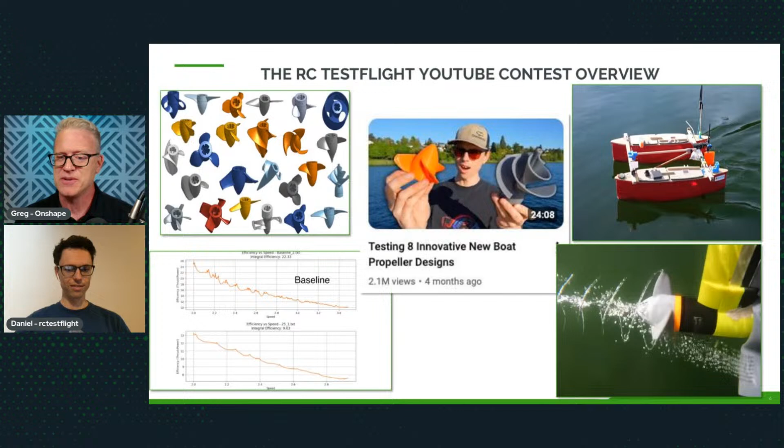So talking of community and talking of other people, let's bring in Austin at this point. Austin, welcome. Thank you. Hey, and so you've been working with Daniel for some time. Tell us a little bit about how this got all hooked up together.

Yeah, so I published my book last year, and I've kind of been evangelizing it since then. So I contacted Daniel earlier this year and told him about my book and what it could do, and it kind of just gained ground steadily as he became more interested in it. I sent him an airfoil, just an airfoil you could update. And then he was at this time mentioning he was setting up the competition, looking for a way that he could allow his community to vary the propeller design.

And that was kind of interesting, because the best version of that was the baseline for the rest of the competition. So in one day, essentially, we took that adaptable airfoil model, put it in a more complicated part where there's several airfoils in combination, and then made a modular propeller. And I still remember Daniel being excited about how the swept tip rebuilt every time. So we just had a lot of fun with it since then.

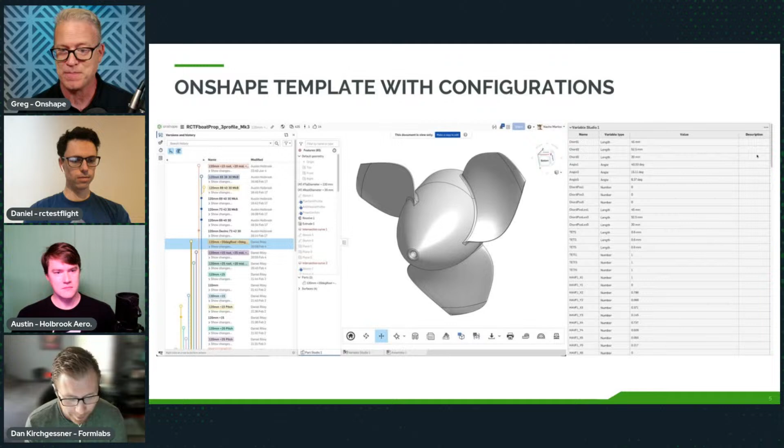So we've got the competition. We've got people uploading digital CAD, hopefully using Onshape, right, and using this baseline, and then going crazy. But of course, you need to get them bolted onto the test motor and put them in that test rig. That takes a lot of serious building skills, right? And Dan, I think this is your area. So welcome, Dan, and tell us a little bit about how you got involved with Daniel and this whole competition.

Yeah, thank you so much. I'm Dan Kirchgessner. I'm the partnerships manager here at Formlabs. And the way this came about was pretty natural and organic and really great. So we had been talking to the Onshape team about content creators they were working with, and Daniel's name came up. This was probably a year and a half ago. And at that time, we had the Form 3, our third generation of our SLA 3D printer out, and we sent one to Daniel. He got some good use out of it.

But earlier this year in April, we released the Form 4, which is our newest machine. It's much faster, and we sent that one to Daniel as well to try out. And the timing happened to line up quite nicely with this propeller design competition. So he was able to iterate quite quickly on these designs, which, as you guys were just mentioning, and I'll use that to jump into kind of how Formlabs is involved.

We make 3D printers. Obviously, to make a physical object, you need a way to produce it, but you can't produce a part without that 3D file first. So you start with the 3D file, then you start to think about production. And propellers, more than a lot of other industrial design worlds, are all about iteration. As Daniel and Austin were just saying, there are a lot of steps of trying something, seeing how it works at a specific RPM and torque value, and then going back to the drawing board and trying it again and again and again. So when we released a printer where the whole point was to iterate quickly and iterate multiple designs during a single day, it seemed like a really perfect match.

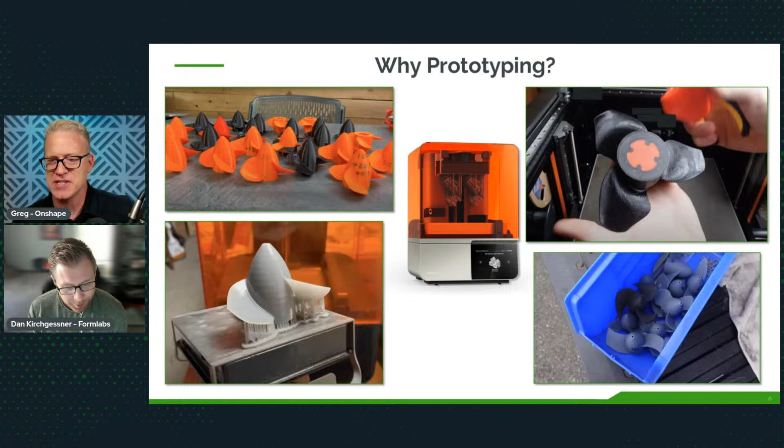So it looks like, in that bottom right-hand corner, there's a bucket of lots of Form 4 printed propellers there, I think. Do you have any idea how many Daniel created, including the iterations? It seems like it's going to be a lot. I don't actually. And when Daniel jumps back on, I'd love to know if he has a rough total part quantity, because I'd be curious to know. But I'm sure it is dozens before he even started soliciting designs from the public. Okay. So do you want to tell us a little bit more about Formlabs?

So a big part of what Daniel was trying to figure out as well from his end, and I know we have some materials on the next slide as well, is just choosing a material, because we make all our materials in-house.

They're all designed to play very nicely with our machines. So unlike some 3D printers, which are obviously great for a lot of people, we try to minimize the amount of fuss that needs to happen with our printers. There's not a lot of bed leveling or things like that. We make the software, we make the hardware, and we make the materials, and they're all designed to sort of mesh very nicely together to minimize that back and forth.

And yeah, this slide. Oh, go ahead. I was going to say that with the portfolio of materials like this, it looks like there is something very specific for just about everything there. It's not just about making a prototype of shape. It's about making it work in an engineering situation too, right? Absolutely. And the ability to bounce between materials quite quickly. On our machines, you can switch between materials in less than 30 seconds. So having a few of these different materials on hand, depending on the material characteristics and properties you want out of your parts at the end, is really important.

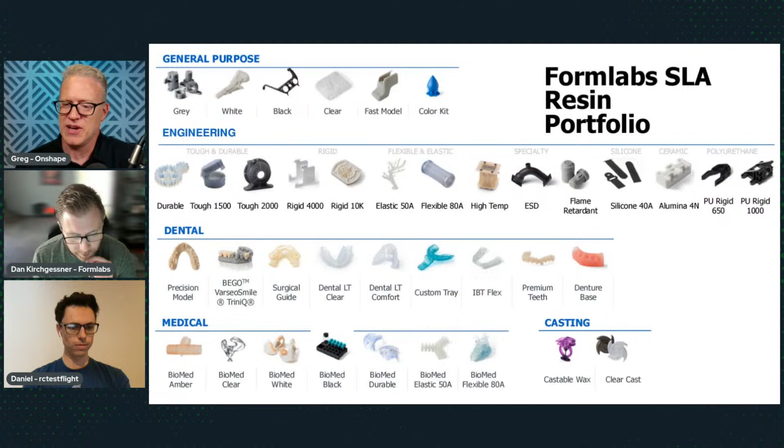Cool. So that's interesting for just the sheer amount of printing that you got done there. And I know that there were multiple episodes of this series, and people were sending in redos, and all sorts of things going on there. That was great. So moving along, it was about this time that one of these other threads I talked about intersected here, and I happened to see this model because it's a public model, and one of my colleagues showed me and said, hey, look at all this cool stuff that's going on.

And I saw this big, long design table. Now, what you're not seeing is that there's probably 250 more lines on that table off the bottom of the screen. And to me, and of course, I use Onshape a lot as head of product, it's near and dear to my heart that something like this will trigger one word in my mind, and that is automation, right? This is an absolute textbook case of an opportunity for automation.

So Austin, you and I separately, outside the competition, of course, because the competition is already going on and people are watching YouTube by this point, but you and I got talking. Can you remind people or just tell people about that? Yeah, I mean, I recall working with Nacho and him sending a few emails back and forth, and I didn't expect anything to come of it.

And then like 2 days later, I got this almost completely current to what's live now feature that would just ingest all the data the way that my book describes it needing to be formatted. And looking back, I like the way we polished it. We worked on it for like 2 months, adding all the bells and whistles and niceties, but I was like, this is finished. So this is excellent. Yeah, cool.

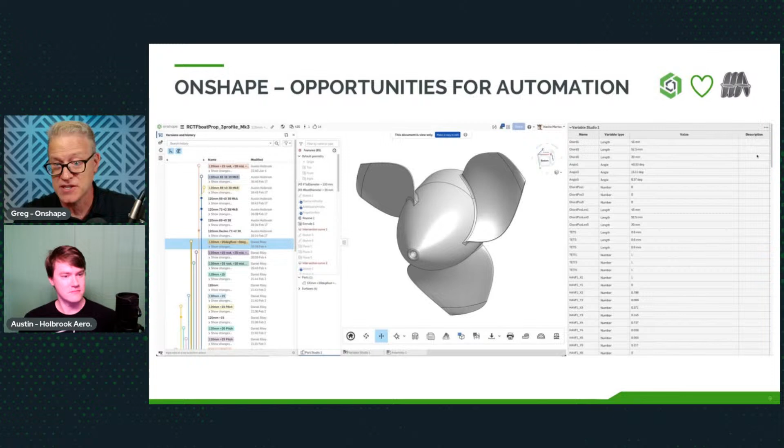We'll get there, right? We're going to get there. I'm taking people on a journey here, right? So we're looking at a big table. You can regenerate this. You can change a few of those 250 numbers and have everything update parametrically, which is great. But when I saw this, I saw an opportunity.

And tell us a little bit briefly, we can go into it a couple of slides later, but there is a book, right? There's a book called the Holbrook Aerospace Airfoil Vector Format, right? Yeah, great name. So yeah, it's a little bit long to say. HAVF. Yeah. And this is what I had to look at, and I saw the opportunity to take data

and create a companion feature using Onshape's custom feature capabilities. We have a language that we developed as part of Onshape called FeatureScript, and with FeatureScript we can create custom features. It's the same language that we use to create the normal features in Onshape as well, extrude, loft, fillet, right? But we can create custom ones. So what Austin's been hinting at is that we created a HAVF profile feature, which takes all of the dirty work of that table and puts it in a nice user interface.

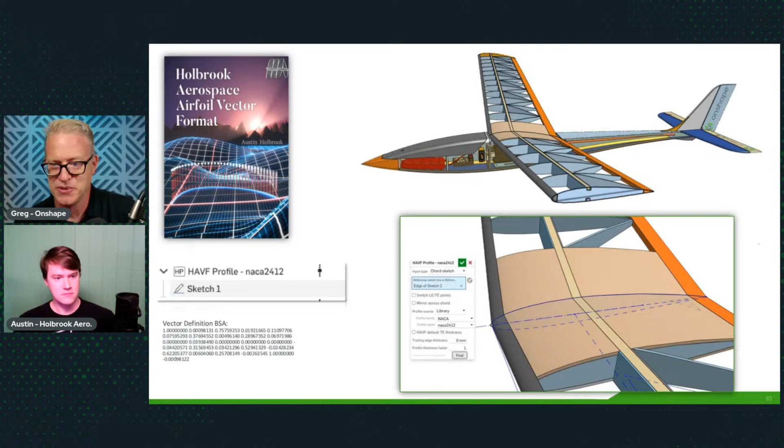And I was doing this anyway because I was building some radio control gliders at the time. That's why it triggered me, just out of serendipity, right? So I built this feature and showed it to you, and here we are. This is the feature which is now published. It's available publicly. You can get it now if you lean in and get that QR code. You can be building HAVF profiles within minutes.

So what does the feature do? Just take us down some of the user interface here quickly. Yeah, what the feature does is any line, any mate connector, you can select it and put this vector-based airfoil on it, and it'll stay glued to that line or mate connector no matter where you send it. So normally when people deal with airfoils, there are popular websites like airfoiltools.com, and it's been coordinate based forever. So that means it's really rigid.

You scale things once and it's hard to deal with, you know, the trailing edge scales with the rest of the design. And here you actually have the option to, you know, keep the trailing edge a consistent size or let the vector control it completely and have it scale uniformly.

And there's all sorts of bells and whistles, like you can flip the direction, you can mirror it across the chord, and you have the option to use the small library, which is sampled from the book, where you can input any custom airfoil HAVF vectors that you wish to kind of create airfoils that nobody really has yet.

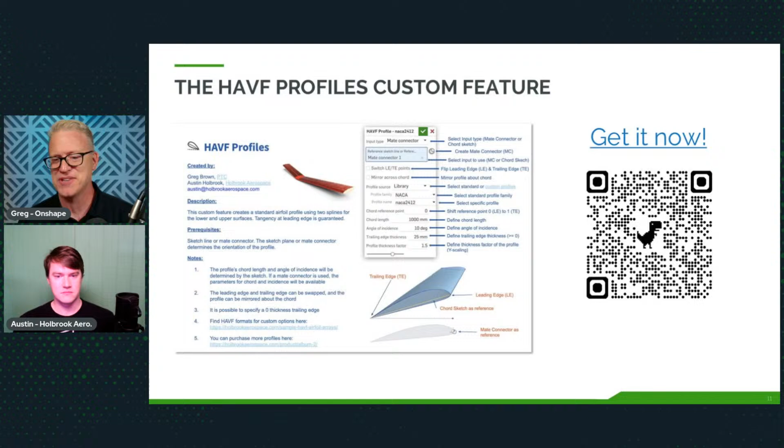It would hardly be practical even for me just as one person, but it was a great kind of showcase of what it could do if it was more optimized. And that's kind of what the feature is, it's completely taking all that. You don't have to build a spline that's perfectly constrained with dimensions anymore. You can just select a line and select a mate connector, and all that's taken care of for you. And there's zero rows of custom data.

You can input the same exact custom profile or a profile from the book, and I modeled this in hours, where I was working on this other model over several days. So it's kind of turned it from a novelty into a really powerful tool, because you have all the geometry data over here in a really fast way to ingest it, and it works really well. Yeah, exactly. And then it fits in with this ethos of making things publicly accessible, sort of open source. But your information is protected.

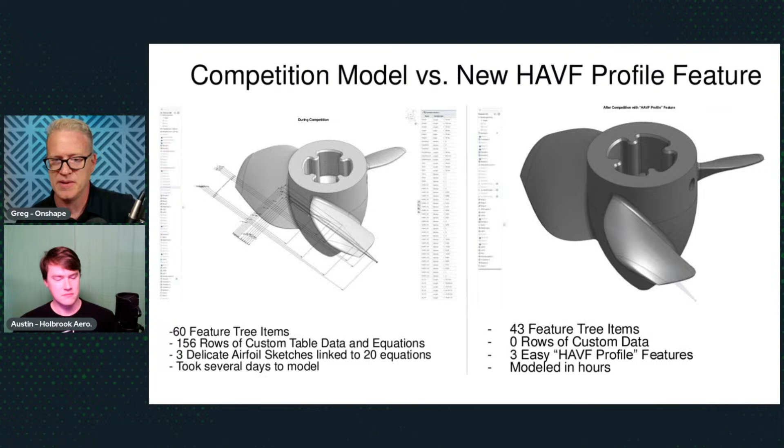You mentioned the book a couple of times. There is some information available about that. There's a YouTube tutorial, as you mentioned. What does this tutorial dig into? Well, this video is different than the one I mentioned that I published yesterday, which was how to make your own airfoils. This tutorial is basically how the feature works. Okay. So basically explaining what we worked on.

And then it talks about the purpose of the vector format and just how well it scales, like automatically updates based on chord or angle of attack, and goes over the book a little bit, about how it removes all the entropy possible from the most popular online airfoil databases, which makes it possible for me to do this fitting process where I can describe all these points using Bezier curves. So yeah, just a kind of tirade about that.

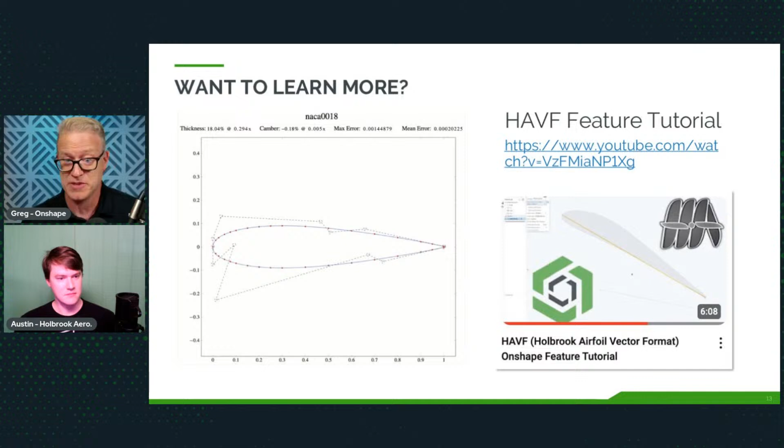Yeah, I was obviously motivated and excited to work on this thing. But while all this is going on, millions of people are watching a design competition. And Daniel was doing a bunch of testing, creating graphs, and coming up with an ultimate winner, since it's a competition. So Daniel, do you want to come back and talk a little bit about some of the takeaways from the design competition?

All right. Do we have Daniel? There we are. There we go. All right. Yeah, there we go.

So yeah, how did it all shake out? What did we learn? Yeah, well, for me, the biggest takeaway was that there's a lot of novel designs out there, but the designs that just look like normal old propellers are, unfortunately, what worked best. It's a little bit more boring that way, but it's the way it is. And one of the really interesting things is that propellers that look more like airplane propellers are actually performing better underwater. And that's probably only true at the lower RPMs and lower speeds that we were working at for the competition.

But the winning propellers kind of looked like you just pulled them right off an airplane and stuck them on a boat. So that was really interesting. I guess there'd be some practical limitations, though. For container ships and things, you wouldn't expect to see gigantic, long, thin, slender propellers because of robustness and the chances of hitting things. And so the engineering has got a lot of trade-offs, right? And that being one of them.

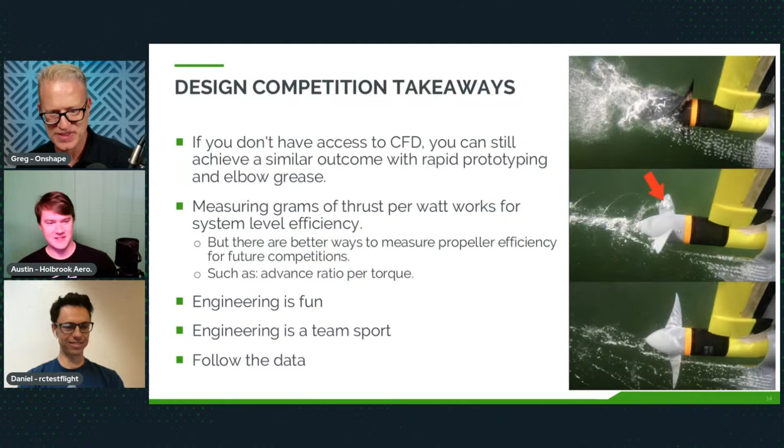Yeah, I think a lot of people kind of got let down because everyone deep down, they want some sort of crazy, novel, organic, nature-inspired looking propeller to be some magical solution that outperforms everything else and becomes the future of transportation as we know it. But sorry, guys, the data says that run-of-the-mill propellers are kind of what works best. Yeah, specifically 2-blade, normal boring propellers. Mm-hmm. Okay. So it's great. And moving on to some other takeaways.

Again, from my point of view, watching this from the side and then participating just on a parallel track, what was really interesting is that with Onshape being part of it, you can access Onshape anywhere, right? You can access it when there's a web connection on a mobile device, a Linux device, a Chromebook, whatever. So that kind of fits in with the open source. Let's get everybody involved, the team sport part of it.

The open source nature of that public document that Austin first shared probably opened a door to many, many more people who otherwise wouldn't have had a chance to participate. And collaborating, if you haven't used Onshape, you can collaborate purely with links. In fact, you don't really want to send a file, right? There's no such thing as an Onshape file. It's a link, and the link can be shared securely. It can be shared publicly, however you choose to do it.

And as you probably have guessed from here, it is high-powered CAD. It's serious professional level CAD that you have access to, and has incredible automation capabilities, which I hope I demonstrated through working on that custom feature with Austin.

And what I like about it is it's changing the fastest. I've worked with other CAD programs that have been kind of similar for the last decade, and I look forward to see where Onshape's going, because I don't think it'll be in the same place a year from now. I know. There'll be 17 more releases by this time next year. So that's how it goes around here.

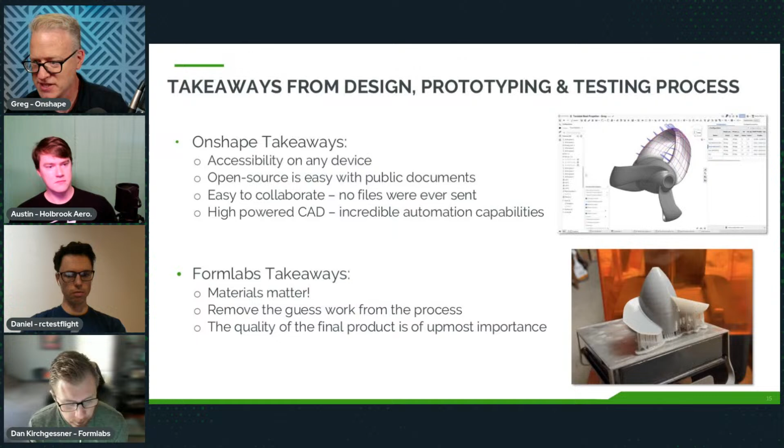Here's a question. I'll jump it to Daniel first, but then Austin, if you have any input as well. We've gotten a few questions about multimodal propellers that could potentially be used for air and water. Daniel, have you looked into that? And what considerations would you have in mind if you were starting a project with that as a goal?

Wow, that's a tough one as far as an engineering challenge. Water is 800 times more dense than air, so yeah, it's going to be very tricky. I would say that the best approach to that would just be to make a motor that can shift gears or something to work at different ranges of resistance, because it's going to be really hard to make a propeller that can work well in both. You just need to spin it slower for water.

I guess on that note, we also got a question, which was, if we're mostly talking about water, when you're designing for air, what are the main things you're thinking about? And it sounds like you started to get into that, which is the ability to spin way, way faster. But what else are you thinking about when you switch to air?

Yeah, air is tougher from a materials perspective because the propeller is spinning so much faster. It's undergoing a lot more stress just from inertia, pulling the blades outwards, centrifugal force. You have to consider the strength a lot more, at least for drone propellers that need to spin at about that RPM, whereas our water propellers were spinning relatively slowly.